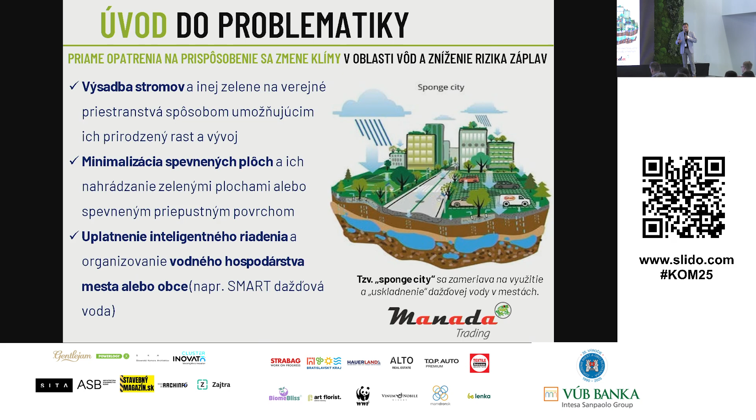This presentation I would like to devote to the representatives of the municipalities. I'm very sorry that many of them are not present, and as Jan told me, I believe they are watching online, and I hope that at least some of these measures will be adopted by them and by their municipalities.

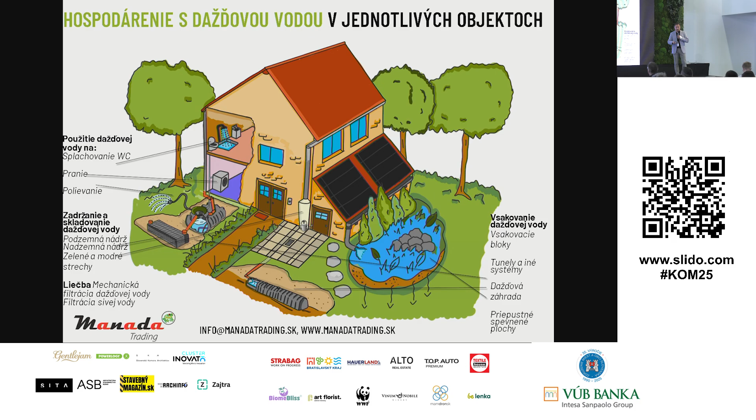The system that we handle starts with individual objects such as a family house or a smaller building, and the system consists of retaining or collecting the rainwater, storing the rainwater, then using the rainwater whenever needed for interior or exterior purposes, and the redundant water gets absorbed.

The system is also possible to apply on a bigger area, and in the case of municipalities, the areas of schools are very useful and applicable, because usually these are extensive areas with extensive surfaces, so there are great possibilities to collect the rainwater. The water can be used within the whole area because there's lots of greenery, parks and playgrounds.

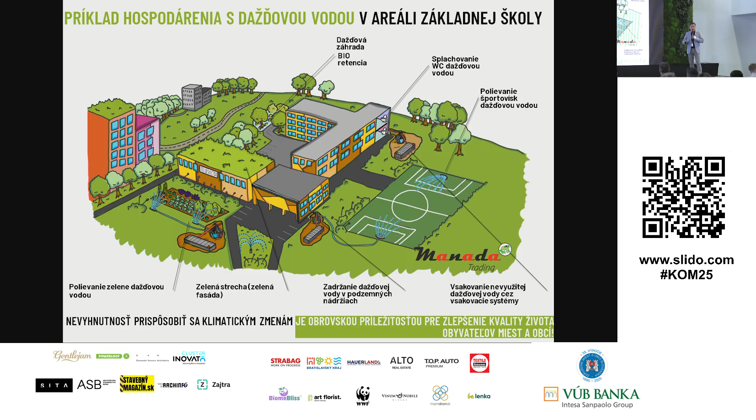Or if the site allows, the water can be used for flushing the toilet. Besides, it's also possible to use it for gardening or growing crops, gardens or flower beds. So this water can also be used for these activities.

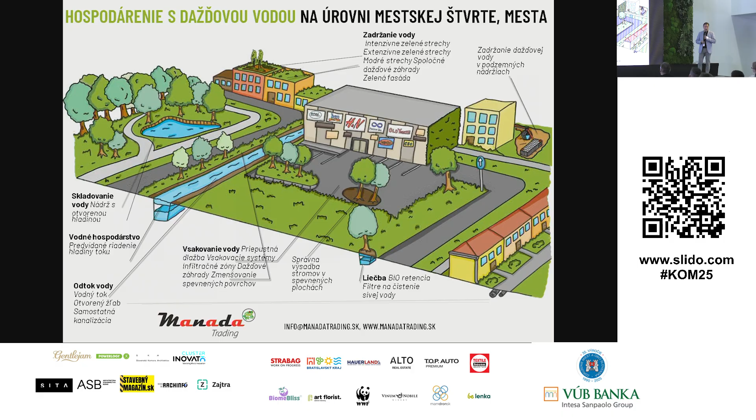Also, these solutions are possible to be used on a more complex level, for example the whole city district. And we can also consider the solution of a bigger scale when it comes to water management or water storage in open containers.

A couple of years ago, the word 'smart,' the magical word of smart, came along, and we use it also with rainwater, even though it's not in the same sense as smart technologies, but we want to show that even rainwater can be dealt with in a smart manner.

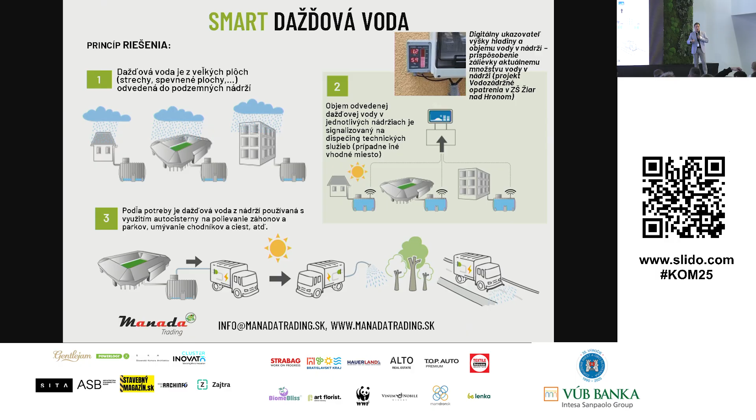Specifically this year, we dealt with the water retention facility in Žiar, also in the area of an elementary school, where the janitor of the school can monitor the current state of the rainwater in the storage containers in cubic meters. Based on that, they can see that for the next two weeks there are going to be extreme droughts, so they can plan the watering in a smart manner and distribute it wisely. So in this way, we are also providing a manual for cities on how to deal with climate change.

When it comes to specific projects, I mainly wanted to present all the things we have executed. I need to repeat, this was only possible because there were calls from the European structural funds in existence. If the calls cease to exist, the cities and municipalities will not pursue this, because cities deal with other issues, as already mentioned, and this is not a priority.

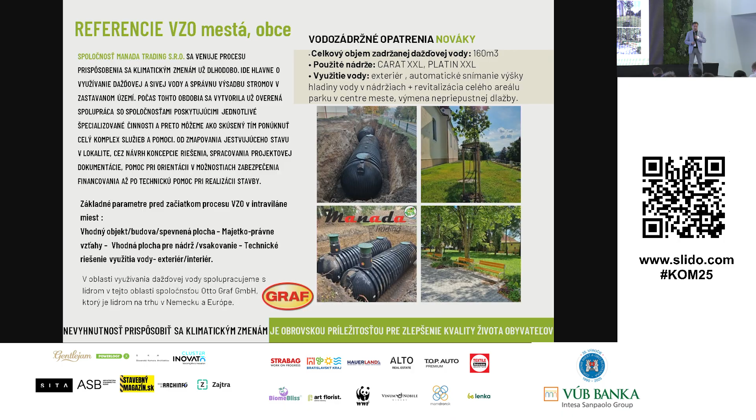One piece of information: in case cities would like to pursue this kind of project, it's important to set the main parameters beforehand. Firstly, identify the appropriate object, so objects with big areas. Proprietary relations are important, as well as appropriate surface where the technology can be placed. We are mainly talking about underground containers where water can be collected. Then think about how to use the water, whether in the exterior or also in the interior, for flushing the toilet.

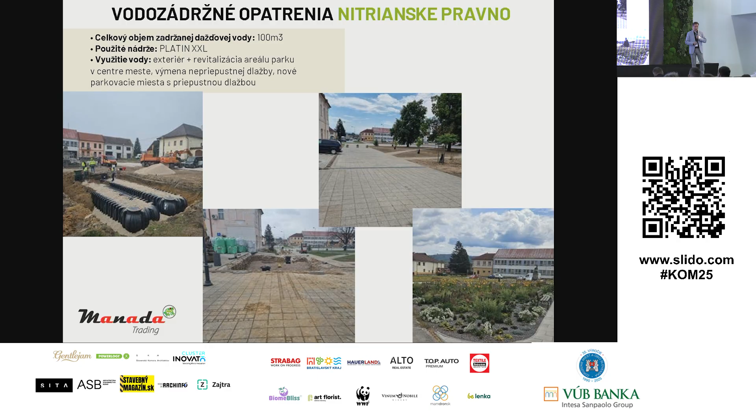One of the water retention measures we do quite frequently in municipalities are city squares. These are usually impermeable surfaces, and cities try to revitalize them. If the square is going to be planted and revitalized, the city already needs to think about how to water and nourish it, so that in two years the flower beds or seeded beds do not turn brown. So it's also good to think about underground rainwater collecting facilities.

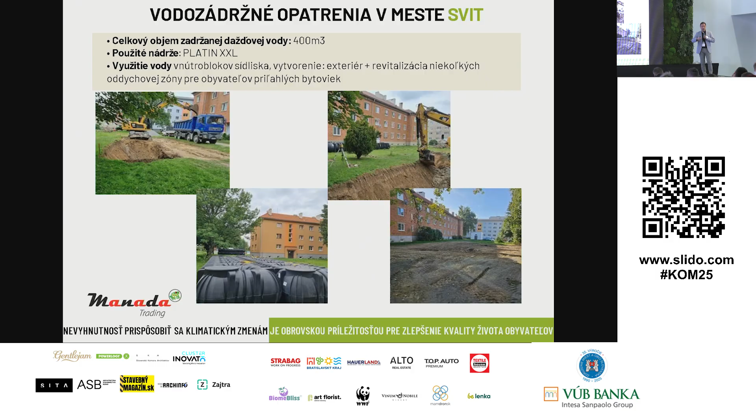Another appropriate space is housing developments. Cities try to revitalize these spaces as well, not just by placing playgrounds and greenery. This specific example is from the city of Svit, where there were Baťa housing developments, and the water has been gathered into this area. When the space was revitalized, this rainwater is now used for maintenance of the green areas.

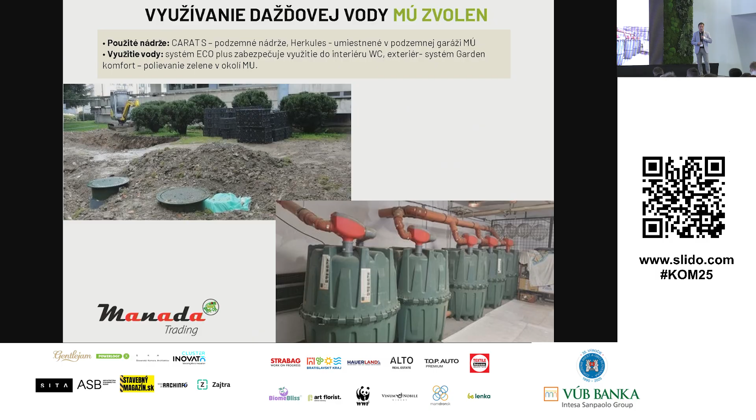If the city doesn't have appropriate space in the exterior, these systems can also be used in the interior, inside of the building. Specifically, here we used containers in the interior. The city already had the grid ready, and we could just connect our containers to it. This water is used in the municipality office for flushing the toilet and also in the exterior, since in any case the water can be used in the exterior at all times.

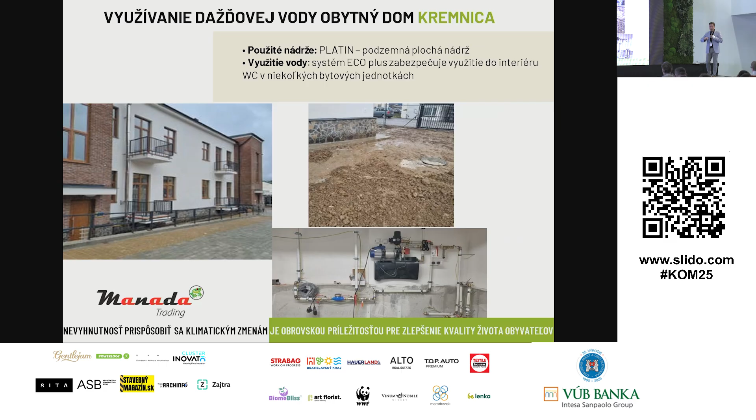This is another case where we replaced drinking water with rainwater. This is a small apartment block, and they have the system underground within the interior. This system fills in for or replaces drinking water, especially for flushing the toilets.

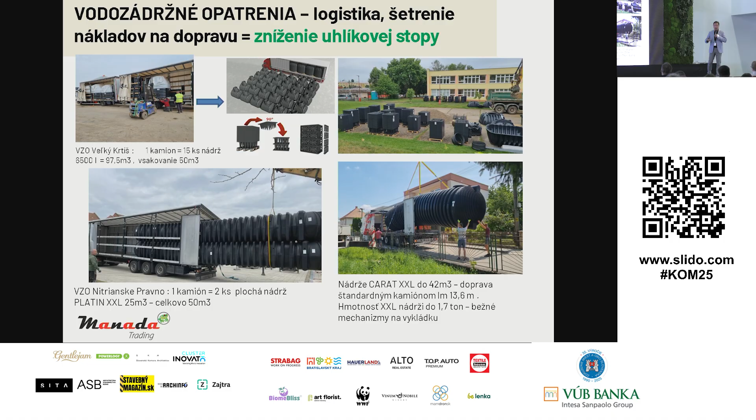One ecological insight I would like to mention: the containers, up to a specific volume of 7 cubic meters, are patented, meaning we can transport up to 15 of such containers. For example, to Veľký Krtíš we transported 50 cubic meters. These containers are also designed in such a way that we can eliminate the transportation of air as such.

Jana wanted me to also mention some bad experiences with water retention facilities. I put it in one slide because usually we do not have any big issues with the measure itself, but I will mention two things. The first one is dirty water in the toilet.

It's not just about the municipalities, but also individuals. When they start using such water, they start to call us. They are disappointed because the water is not as clean as from their tap. Yes, it's a bit cloudy, because it's not drinking water. It's very possible that the water will not be transparent in all cases. It's at a constant temperature of 8 degrees, and it maintains its quality for flushing the toilet.

But this is one aspect that I wanted to mention. And the second, or the only bad experience that we have encountered in water retention measures, is insufficient mechanical filtration of water or completely lacking water filtration, just because of the human factor or error.

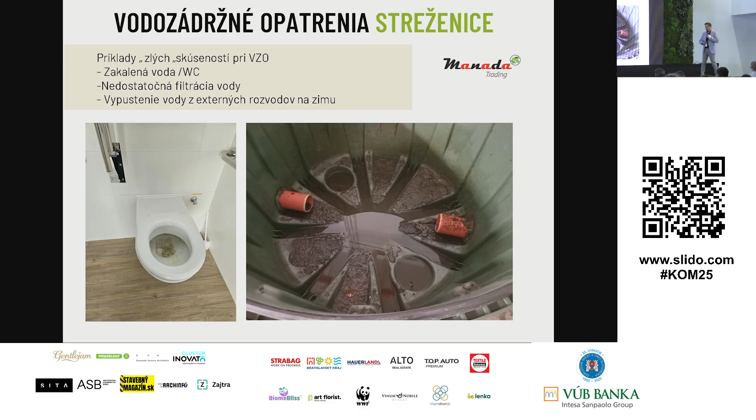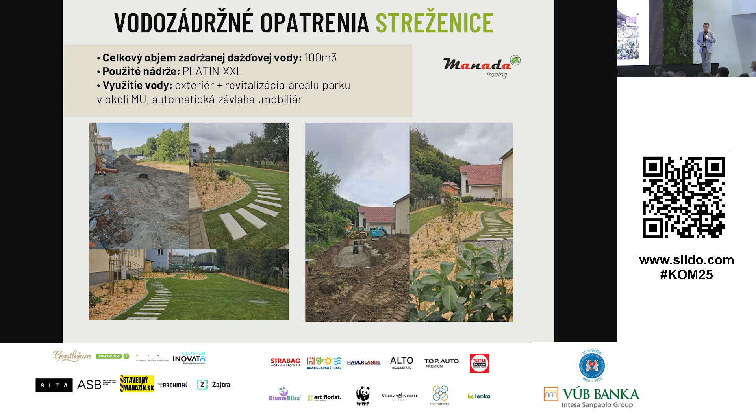The third thing that I wanted to mention, within the framework of what the gentleman from the Association of Cities and Municipalities of Slovakia mentioned, is that when it comes to water retention and rainwater use, thinking about water as the raw material of the 21st century, we need to handle it from an early age. This is the most promising solution that I think exists. And it's like a marathon - this will not change in one day or one year, but the generation of our children will view drinking water and rainwater use from a different perspective than our generation does.

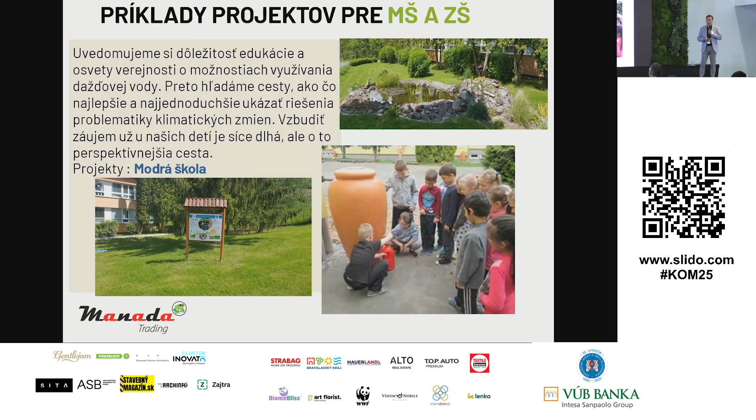We had a beautiful project, again funded by the Norwegian structural funds. It was called Blue School. A very similar concept was applied to yet another school - collecting rainwater into an underground container, the water is used for exterior purposes, for gardens, for greenhouses. The kids learn to use this water for watering, and if possible, it was also used in some cases for flushing the toilets. There were a couple of such schools, kindergartens and elementary schools.

I believe that if we start with water retention measures here, there is a chance that it will get better in 20, 30 years. I also see Laci here. One positive piece of news that I would like to boast about.

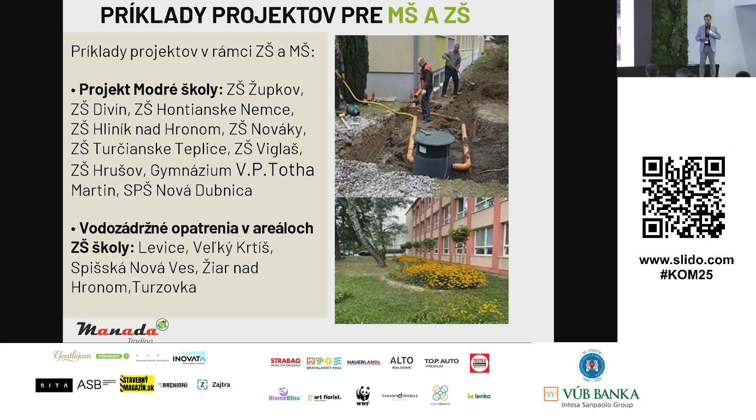I was told that there are no representatives from SMOS, but there is one representative from this association - no, two representatives. And I'm also a deputy in one little town. We have the beautiful Bojnice Castle there. Yesterday, our deputies just approved a water retention project for library revitalization. I hope that in 1 or 2 years I will also be able to present my birthplace, having been added to the list of all these municipalities where we applied these measures. I'm very happy that with our German partner we are part of the Urbanex project, which we will talk about in the next presentation. We already communicate with our partners, and we will be implementing complete water retention systems.

I believe that the cooperation will be successful. As I said, if we have any professionals here, please take the almanac and also the message for the association representatives - I will wait for your phone calls.